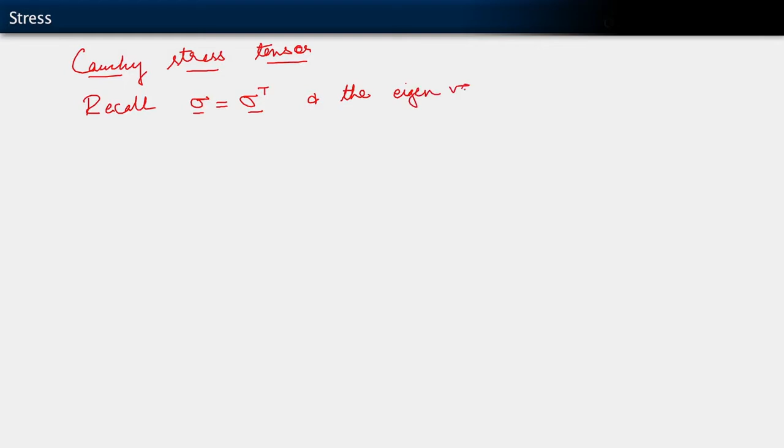What I want to do today is just complete in this segment a few more things about the stress. So we're continuing here, talking about the Cauchy stress, and in particular things related to the fact that the Cauchy stress is a tensor. So, recall first of all that the Cauchy stress is symmetric. Recall this and the eigenvalue decomposition, or really the eigenvalue problem.

And the eigenvalue problem for the Cauchy stress is this one: we wrote it as sigma n equals lambda n, where n belongs to R3. It's a vector; furthermore, it's a unit vector. And we saw that lambda belongs to the reals. In particular, the fact that the stress is symmetric tells us that lambda is a real number as against a complex number.

Now you may recall that earlier, when we studied kinematics and looked at the right and left Cauchy-Green tensors and the stretch tensors, we said that the fact that those objects are symmetric means that from the eigenvalue problem we can also write a so-called spectral decomposition of them. This is the case with the Cauchy stress tensor also. It's symmetric, and therefore sigma admits the spectral decomposition.

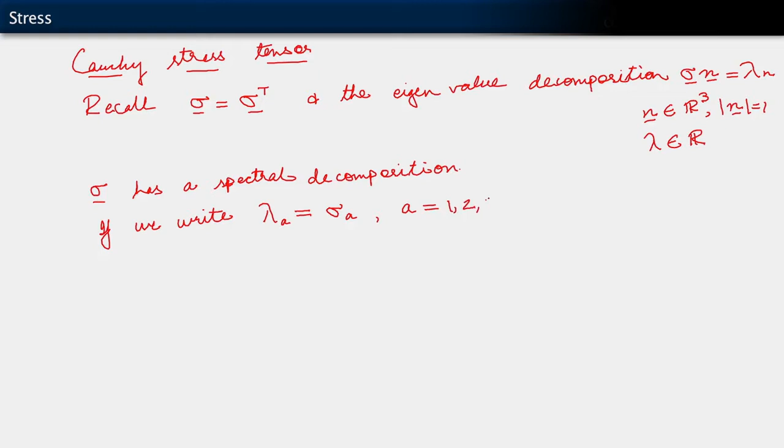And now, just for distinctiveness from the way we wrote out the spectral decomposition of the various stretch tensors, we write the eigenvalues lambda sub A equals sigma sub A, for A equals 1, 2, 3. We're just relabeling the eigenvalues.

Then we write out the spectral decomposition as follows: sigma equals the summation from A equals 1 to 3 of sigma A, NA tensor NA. Here the sigma A's are the eigenvalues and the NA's are the eigenvectors. In the context of mechanics, the sigma A's are also referred to as the principal stresses, and the NA's are the principal directions. So that's one thing I wanted to say about the Cauchy stress tensor.

The next thing is, let's think about particular states of stress. Suppose we have the body of interest, and we are looking in every case at uniform stress states. This means the stress is uniform over the body. So we have our basis, the body in the current configuration, and a stress sigma, and the loading on the body is such that the stress is uniform over this entire body.

So in the context of using our props here, we have our basis and our body in the current configuration, because the Cauchy stress is defined on the current configuration, and whatever is happening to the body, the stress tensor is uniform throughout. At every point in the body, you would find the same stress. So consider uniform stress states.

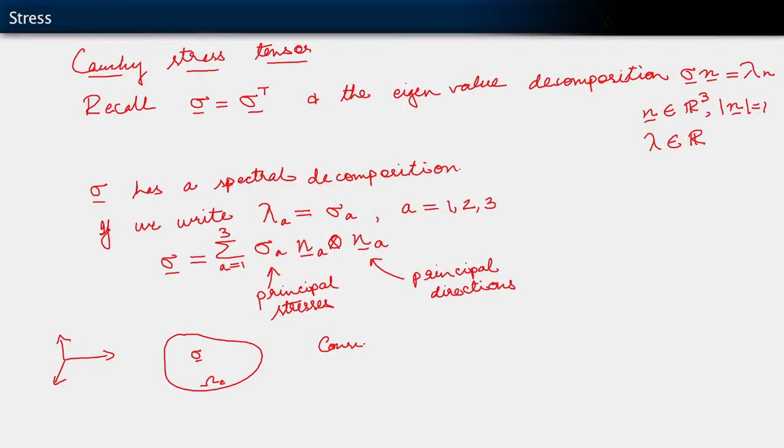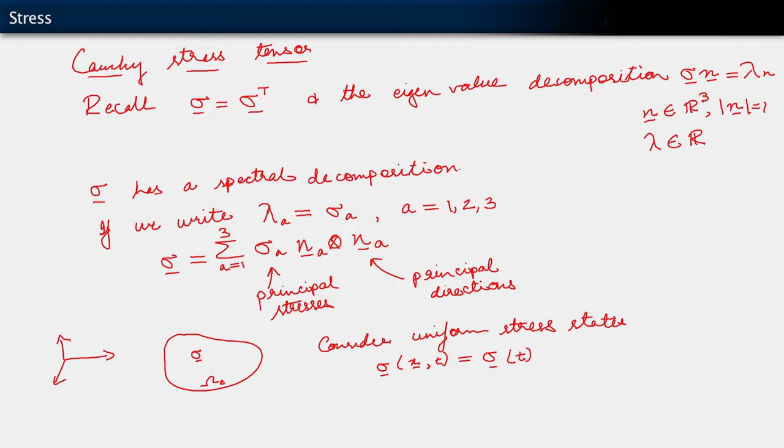What this means is that sigma, as a function of position and time, because it is a spatial function after all, is just a function of time. Just to keep things simple; there's no significant loss of generality for what I want to say here. All I want to point out is what happens if you talk of a uniaxial state of stress.

So let n be a vector as we've always used, and be a unit vector. If we have a stress tensor where sigma is written as sigma bar n tensor n, this is a uniaxial state of stress. We've written it using our dyadic notation, our tensor product notation, and the fact that we can expand the stress in terms of an orthonormal set of vectors.

If you compare this with the way we wrote tensors in general, by expanding them in terms of the basis, you will see that we've effectively picked just one of those basis vectors. So this is how you write out a uniaxial state of stress. And it's easy enough to check that sigma n is equal to sigma bar n. So sigma bar is also an eigenvalue and n is an eigenvector.

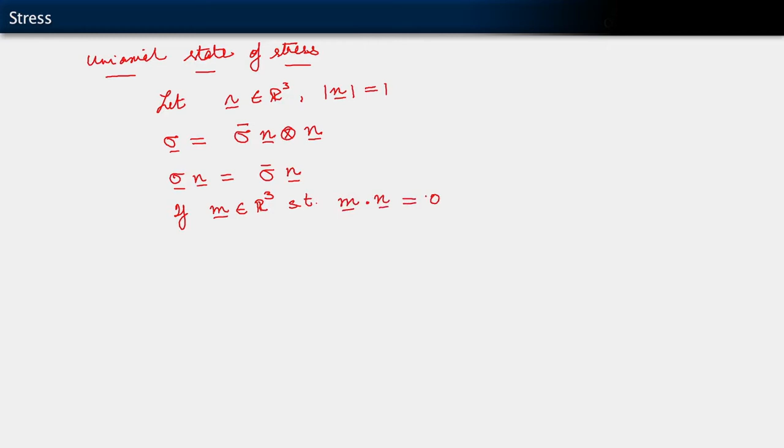Furthermore, if m belonging to R3 is such that m is perpendicular to n, it follows that sigma m equals 0. Easy to check.

What this means is that if we consider any surface in the body, as long as that surface is oriented perpendicular to the n direction, we get a non-zero traction across that surface. If we consider any other surface, not that one.

If we consider in particular a surface that is perpendicular to m, like that one, right? The traction across that surface is 0. Okay, so effectively what we have here is a stress that sort of acts only along the n direction. Okay, so easy enough. And then from here we can go on to the idea of a biaxial state of stress.

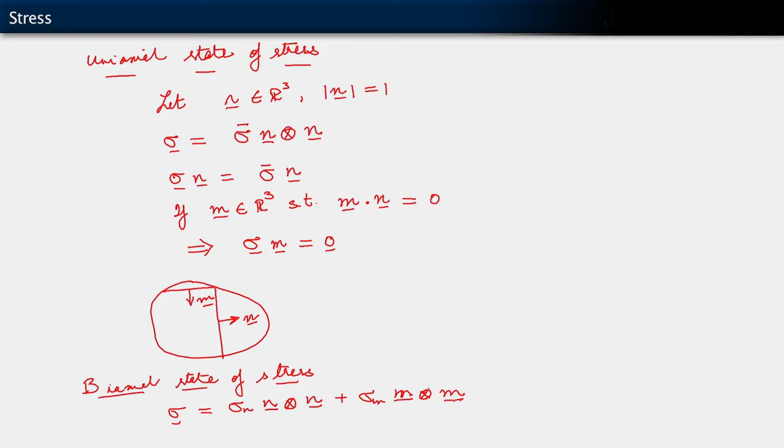So for the biaxial state of stress, we have sigma equals sigma n tensor n plus sigma m tensor m. Okay? And of course now it's trivial, but you can go on to a triaxial state of stress by adding on another term of this type, where you use another vector that is perpendicular to n and m. And effectively we've reconstructed then the spectral decomposition of sigma. Okay, so let's just finish that up.

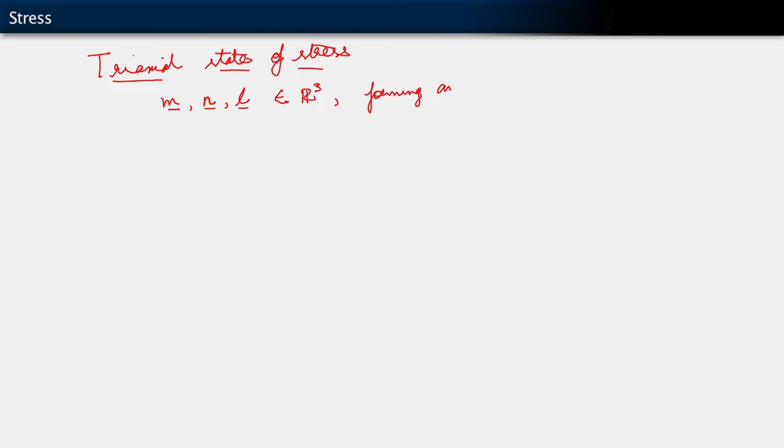Okay, m, n, and maybe L, right? I wrote them in the wrong order relative to the alphabet. Anyway, all belong to R3, right? And let me just say that they form an orthonormal triad. And forming an orthonormal

triad, right? Then we can say sigma equals sigma m tensor m plus sigma n tensor n plus sigma L tensor L. Let me make this clear. Okay, and really what we've done here is it turns out that m, n, and L are in fact the eigenvectors of the stress tensor in this case, and sigma m, sigma n, sigma L are the eigenvalues. Okay.

Finally, let's just look at what is often called a hydrostatic state of stress, which is a special case of the triaxial state. Hydrostatic state of stress. This is when sigma m, sigma n, sigma L are equal. So we can look at this as sigma equals, let's just denote the common value as sigma bar, times m tensor m plus n tensor n plus L tensor L.

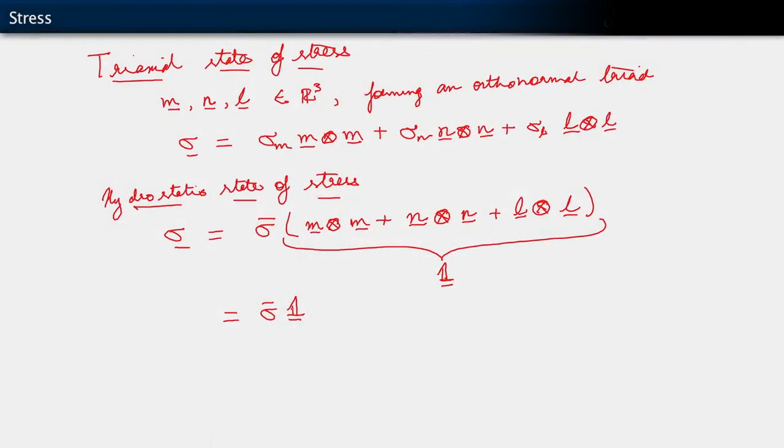So what this means is that n dot sigma n equals sigma bar, as is easy to check, for all n. Take any direction n, it's the same. All right. Oh, yes, one last thing. Let's just put down a general state of shear stress. Okay, so shear stress.

As before, we have m and n are vectors, and they are perpendicular to each other, each of unit magnitude. Okay? In this case, what we have is that sigma equals, let's say, sigma s times m tensor n plus n tensor m. That is a state of shear stress in the so-called MN plane. All right? Let's see how this works.

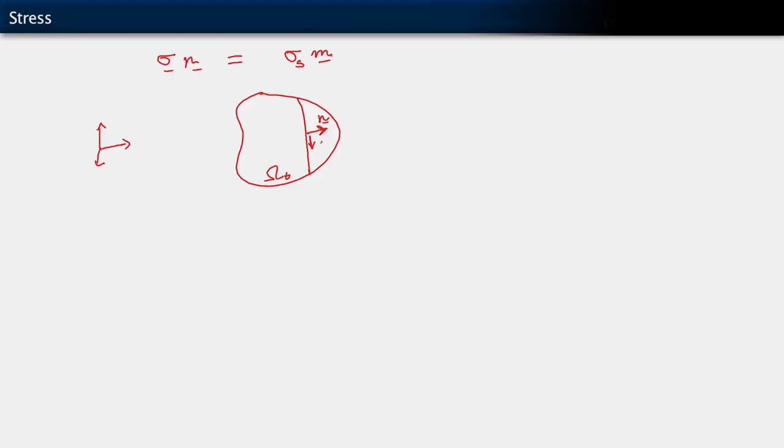If now we take sigma n, we would get sigma s m. Okay, so this is our body, and we take a surface. If that is the n direction, and this is n, the traction that we get on the surface is in this direction. So let me just do this. What we have there is the traction sigma s m.

If on the other hand we took a surface perpendicular to the m direction, what we would get is sigma m equals sigma s n. So then we would get that to be the traction vector. All right. So clearly these are states of shear stress. On the two surfaces we've considered, we see that the effective traction is tangential to the surface, which is our notion of a shear stress.